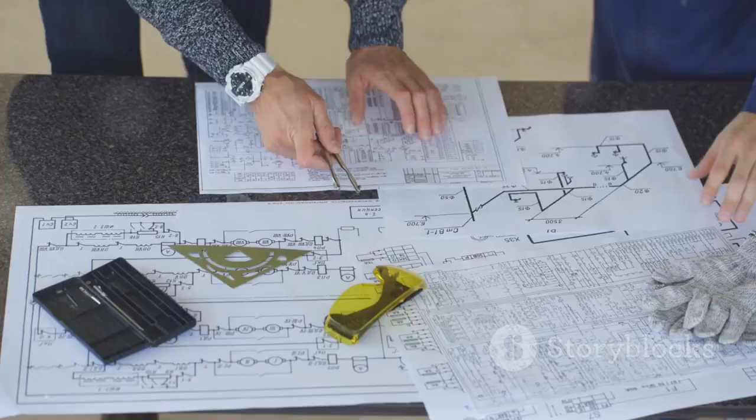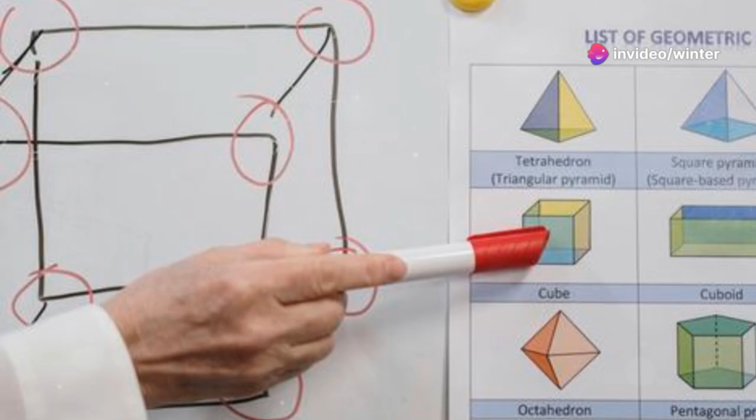Let's face it, traditional 2D engineering drawings can be confusing, forcing your brain to piece together flat views into a 3D object. Isometric drawing changes the game. It's a 3D pictorial view, showing an object as if you're looking at it from a corner, with all axes at equal measure. No tricky foreshortening. This method bridges the gap between blueprints and real objects, making designs instantly understandable to anyone, engineer, machinist, or client.

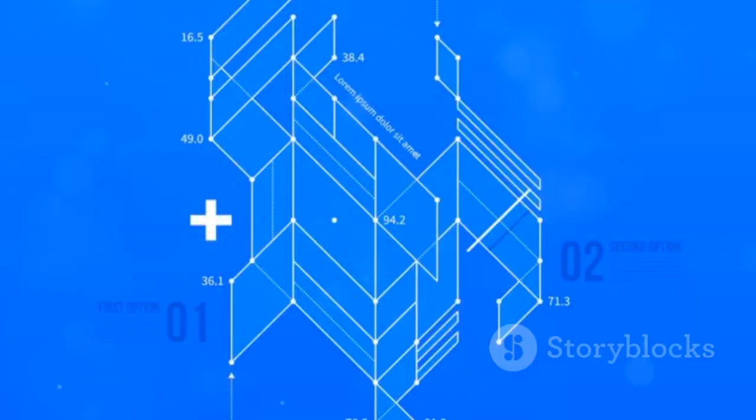Isometric views clarify how features relate in space, eliminating ambiguity. They don't replace detailed orthographic drawings, but they're the perfect companion, showing the big picture at a glance. Imagine explaining your design. A quick isometric sketch communicates more than words ever could. It's a universal language for brainstorming, presentations, and ensuring your design gets built right. Mastering isometric drawing means faster, clearer communication. It's an essential skill for every engineer.

Before you start sketching in 3D, it's important to gather all your essential tools. Preparation is key to a smooth workflow and better results. For hand drawing, isometric grid paper is a must. It makes setting up your axes effortless and helps keep your proportions accurate from the very beginning. Use a sharp mechanical pencil for crisp, precise lines, and always have a quality eraser handy for quick, clean corrections. These basics make a big difference.

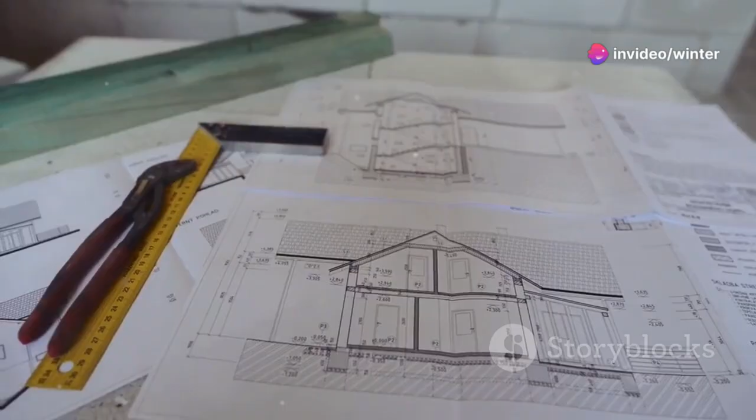Want to go pro? Add a drawing board, T-square, and a 30-60-90 triangle for perfect angles, since isometric axes are always at 30 degrees from horizontal. These tools help you maintain accuracy and speed up your process. In the digital world, CAD software like AutoCAD or SolidWorks has isometric modes that snap your lines to the right angles automatically, saving you time and reducing errors.

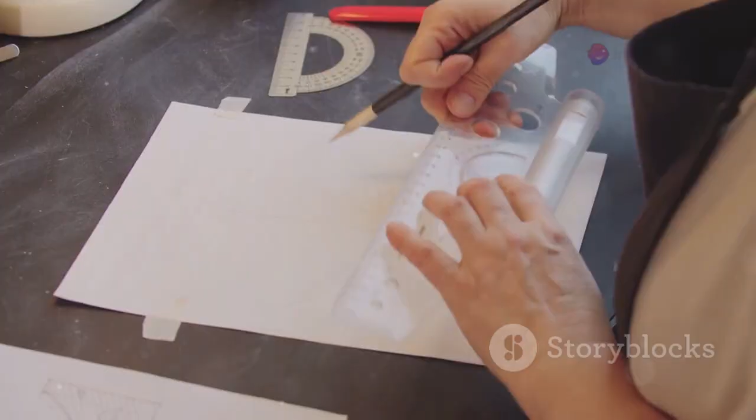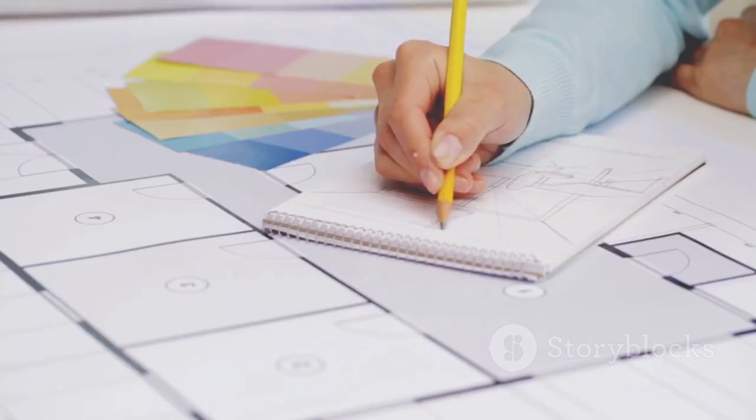Whether you're working by hand or on a screen, always start with light construction lines. These are your guides, not your final marks. They help you map out your drawing before committing to the final lines. Sketch lightly at first. You'll go over the real edges later with darker, more confident lines. This layering technique keeps your work clean and easy to adjust. Heavy lines too soon make for messy, hard-to-correct drawings. It's much easier to erase or adjust faint lines than bold ones. Think of construction lines as scaffolding, temporary but essential. They support your drawing structure until you're ready to finalize.

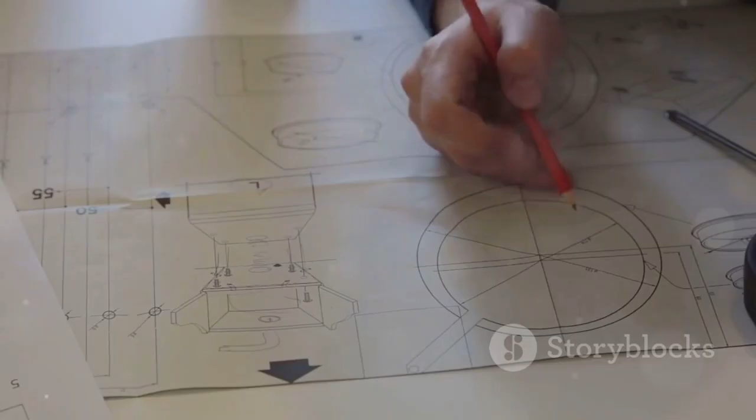The most important tool? Your brain. Plan before you draw. Take a moment to visualize your object and the steps you'll take. The second most important? Those light, barely there lines. They're the foundation of every great sketch. Start every drawing with a gentle touch, letting your ideas take shape gradually and naturally. Build up confidence as you go, darkening your lines only when you're sure of their placement and accuracy. That's how you get clean, professional results, by combining the right tools, careful planning, and a steady, patient approach.

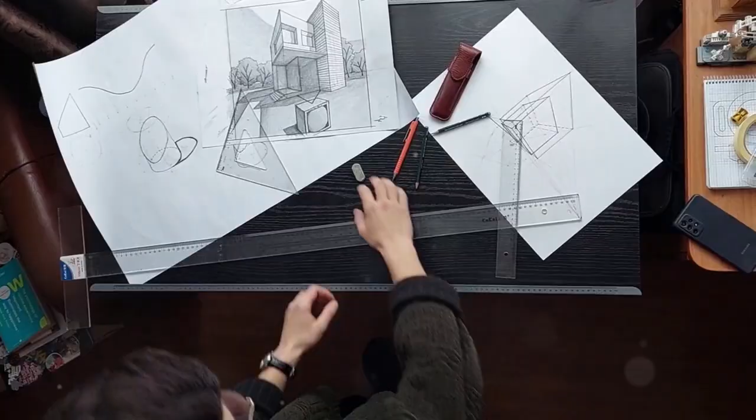Every isometric drawing starts with 3 axes, 1 vertical, 2 at 30 degrees from the horizontal. Picture the corner of a cube. This is your foundation. Draw a light horizontal reference line, pick your origin, then use your triangle to draw the 30-degree axis and a vertical axis. All measurements, width, depth, height, are made along these axes or lines parallel to them. Before adding details, sketch a light box that encloses your object. This keeps proportions correct and prevents distortion. This boxing method is your guide for every feature you'll add.

Any real-life vertical line stays vertical. Any horizontal line follows a 30-degree axis. Non-isometric lines like slopes come later. First, get your framework right. Consistency is key. Always use light lines for setup. Build the box before you build the part. This approach keeps your drawing accurate and easy to read. Don't rush. Lay the groundwork carefully. The setup phase is where precision starts. Get your axes and box right, and the rest falls into place. That's the isometric mantra.

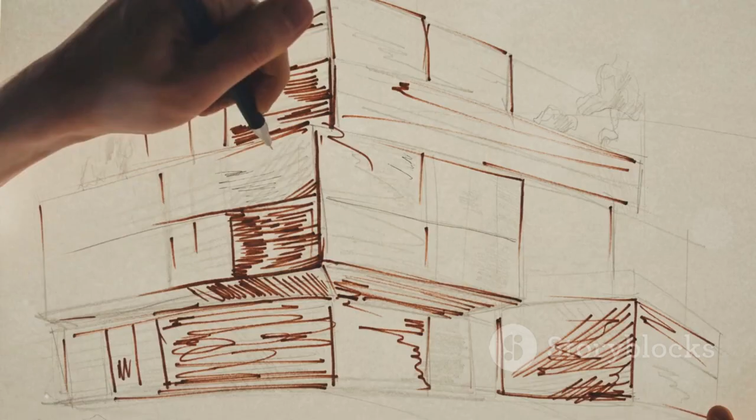The boxing method is your secret weapon. Imagine any object fitting inside a transparent box. Start by drawing this box using the object's maximum width, depth, and height along your isometric axis. For a cube, measure equal lengths along each axis, connect the dots, and you have a perfect isometric wireframe. For a rectangular block, use the same process with different dimensions. Once your light construction box is done, trace the visible edges with a darker line. This makes the object pop off the page.

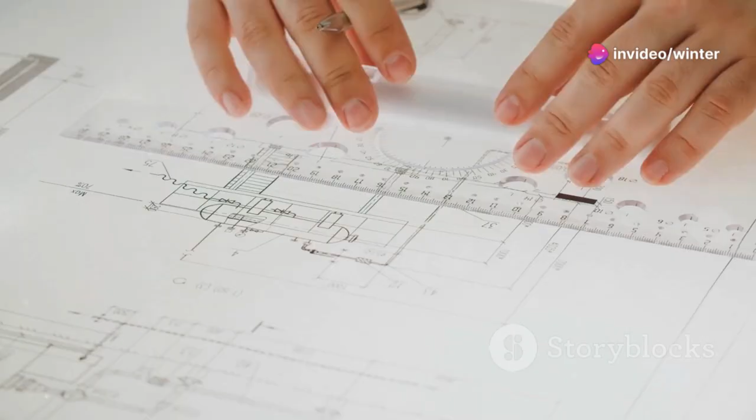The box keeps everything in proportion and makes complex shapes manageable. Always build the scaffold first, then finalize the object. This two-step process, light lines, then dark, keeps your drawings clean and professional. Master the box, and you can draw anything, no matter how complex. It's the foundation for all isometric sketching. Practice this method until it's second nature. Every great drawing starts with a box. That's the secret.

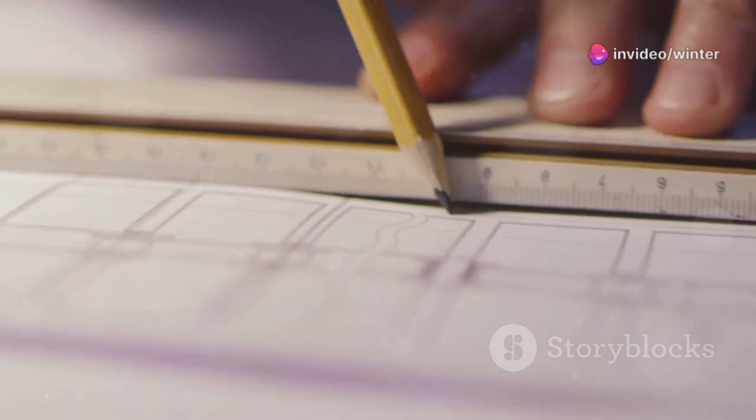Not everything is a box. In fact, most real-world objects have slopes, curves, and all sorts of funky shapes that make them interesting and functional. So how do you draw slopes and curves accurately in your technical drawings? For any angled or non-isometric line, use your box as a coordinate system. First, carefully locate the end points of the line within the box, then simply connect them. This method keeps your drawing precise and proportional.

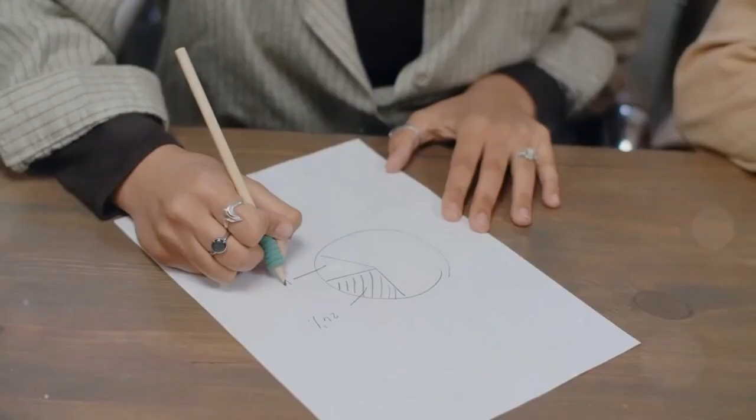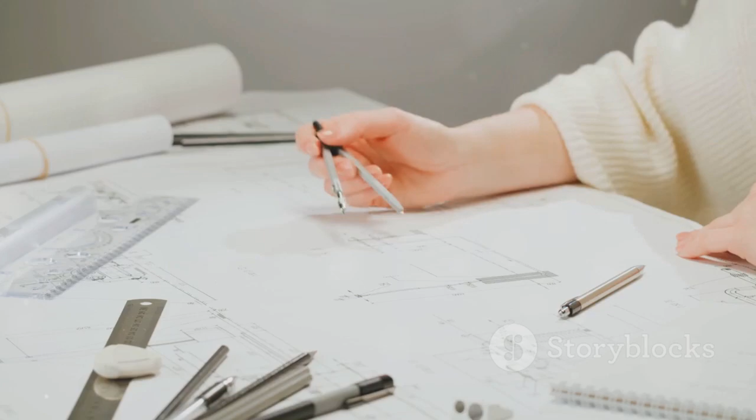For a wedge, start by drawing the enclosing box to define the boundaries of your shape. Next, find the start and end points of the slope you want to create, marking them clearly. Then, simply connect the dots. No angle measuring needed, just a straight line between your reference points. When it comes to circles, remember that in isometric drawings, circles become ellipses due to the perspective. Never use a compass for a circle here. It'll look wrong and distort the illusion of depth. Instead, use the four-center ellipse method.

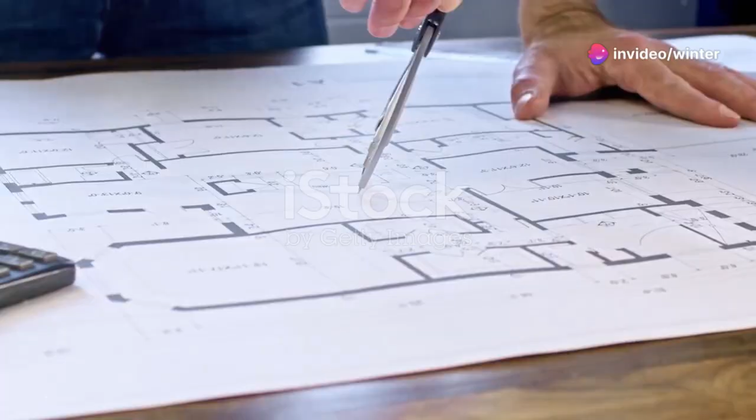Draw an isometric square, find the midpoints of each side, and use arcs to create the ellipse. This technique gives you a much more accurate result. For quick sketches, you can draw the ellipse freehand inside the isometric square, making sure it touches the midpoints for a convincing look. In CAD, use the ISO Circle tool for perfect, mathematically accurate results every time. The key is always to use the box to find reference points.

Practice drawing ellipses. They're essential for representing holes, cylinders, rounded edges, and more. Don't just guess at curves. Use construction lines to guide you, ensuring accuracy and consistency. Every complex shape starts with simple geometry. Break it down into basic forms, use your box as a guide, and connect the dots step by step.

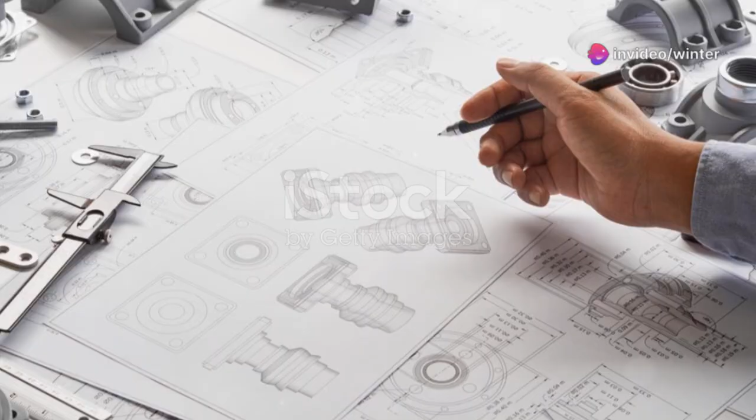That's how you handle any funky shape, no matter how complicated it looks at first. The box method works for everything: slopes, curves, and all the wild shapes you can imagine. Keep practicing, and soon these techniques will become second nature.

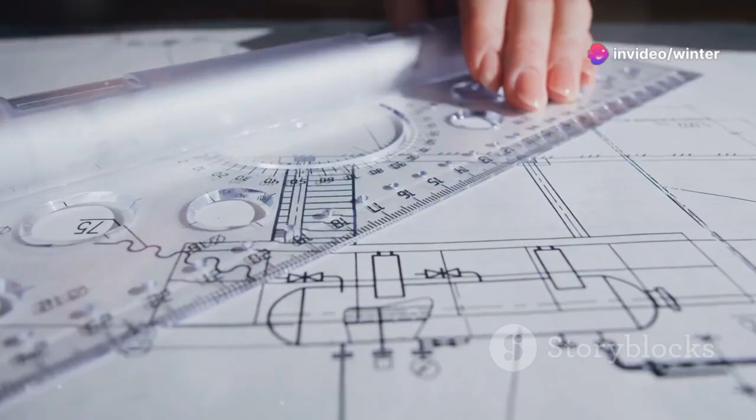Now let's combine shapes for realistic parts. To draw a cylinder, start with a box. Its top and bottom faces are squares equal to the cylinder's diameter, and the height matches the cylinder. Draw ellipses on the top and bottom faces, then connect them with vertical lines for the sides. For a hole, reverse the process. Draw the ellipse on the surface, then show its depth with a second offset ellipse.

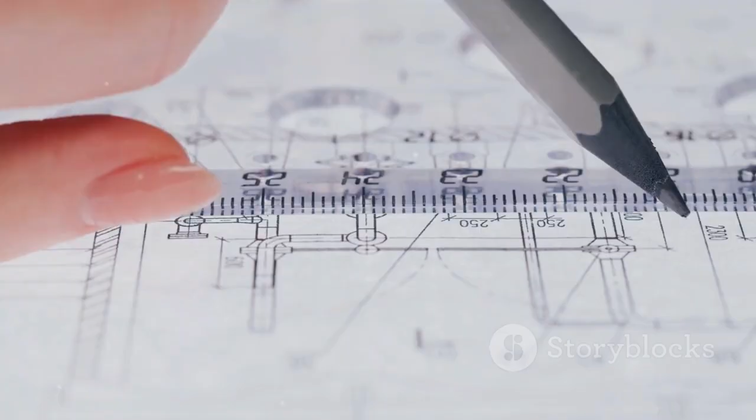For fillets and rounds, mark tangency points, then sketch a smooth arc between them, inside for fillets, outside for rounds. In CAD, use the fillet command, but by hand, focus on smooth, tangent arcs. These details add realism and clarity. Always use construction lines to find key points. Clean up with dark, confident lines for the final look. Details make your drawing stand out. Practice combining shapes and adding features.

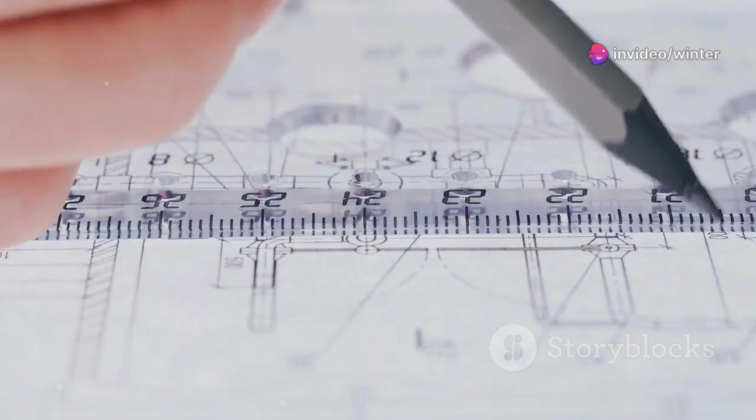Features like slots and pockets are just combinations of shapes you already know. For a slot, draw the center line, then the straight sides as isometric lines, and the ends as half ellipses. Drop vertical lines from the slot's outline to show depth, then connect the bottom with matching curves. Pockets are similar. Draw the rectangle on the surface, drop verticals from the corners, and connect the bottoms to form the floor.

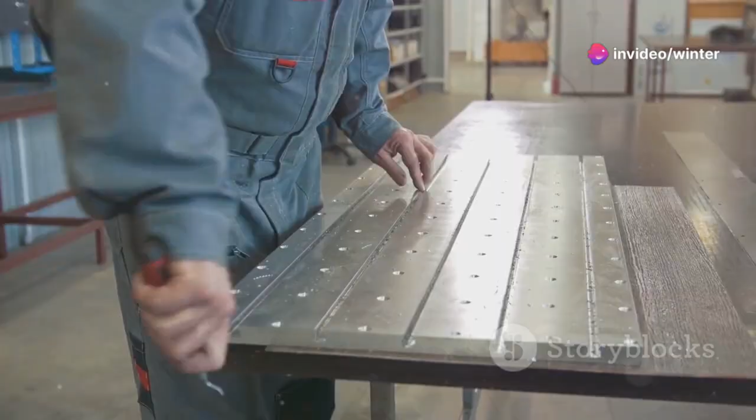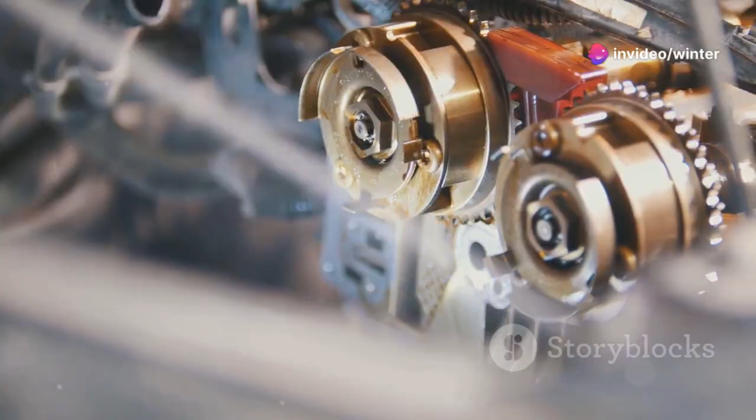Chamfers are even easier. Measure back from the edge, draw a parallel line, and connect to create the beveled surface. Use light lines for setup, then darken the final edges. These techniques make complex parts easy to visualize. Always break features down into basic shapes. Use construction lines to keep everything aligned. Add details step by step. That's how you show inner workings clearly. Practice these features to level up your drawings.

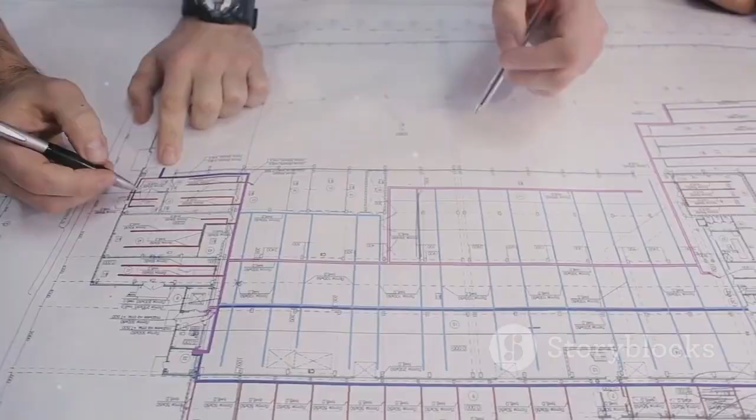A drawing without dimensions isn't useful, so add them the isometric way. Dimension and extension lines should run parallel to the isometric axes. Write numbers so they sit on the isometric plane. Use oblique text if possible. In CAD, set dimensions to match the isometric view for a professional look.

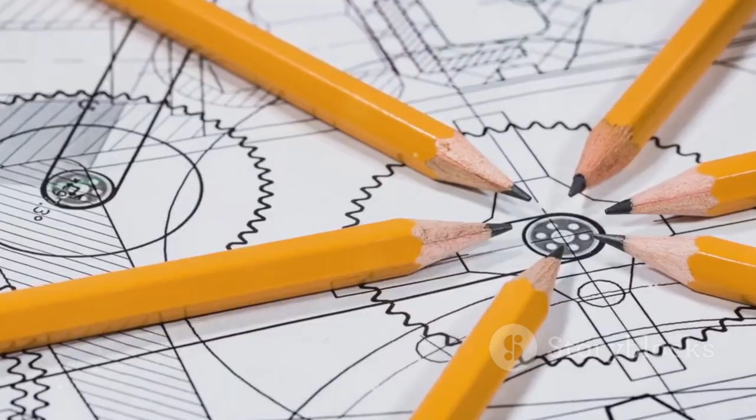Avoid common mistakes: never eyeball angles. Use your triangle or grid. Don't mix perspectives. Keep everything in isometric. Never draw true circles. Always use ellipses. Use consistent line weights: light for construction, dark for visible edges, dashed for hidden lines. This hierarchy makes your drawing readable.

Sloppy lines confuse the viewer. Control your pencil or CAD settings. Clear, accurate dimensioning is the mark of a pro. Practice these habits every time you draw. That's how you avoid rookie mistakes.

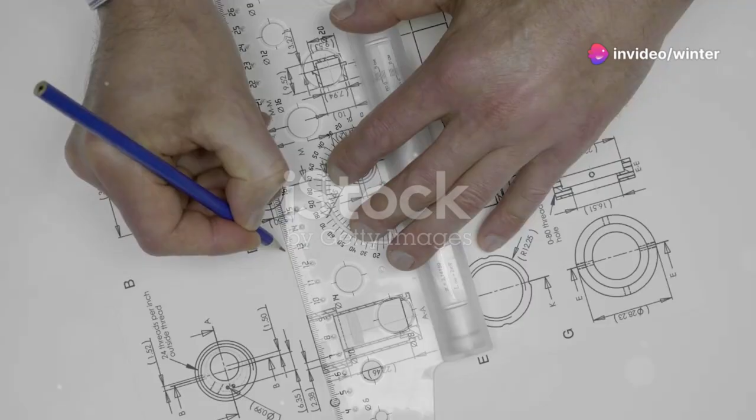Now it's time to practice. Let's put theory into action and see how your skills translate to the page. Here are 3 classic isometric challenges to get you started. First, try drawing an L bracket, a staple in mechanical design. Begin by sketching a box that defines the overall size and boundaries of your part. Then carefully erase the sections to reveal the L shape, making sure your proportions stay accurate. And finally, add a hole as an isometric ellipse to complete the bracket.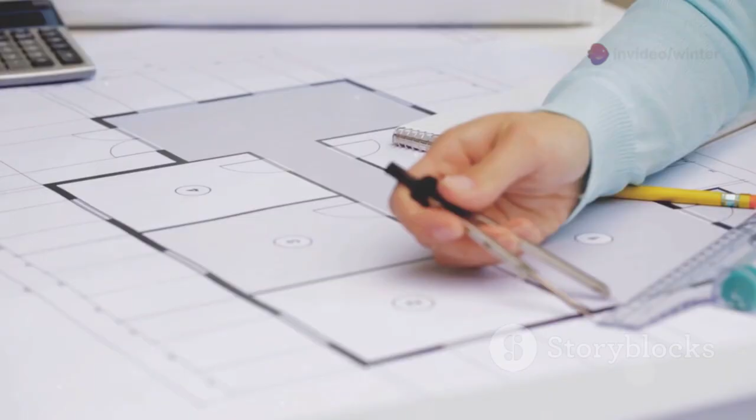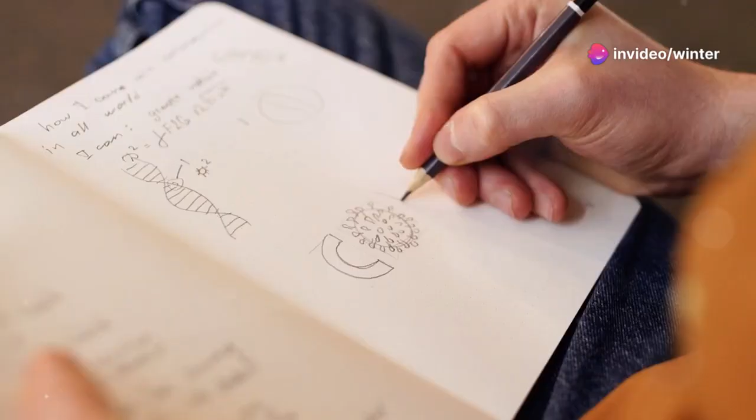Next, tackle a flanged plate. Draw the main block, then add a centered cylinder on top using ellipses and tangent lines to make it look three-dimensional and precise. For the third challenge, draw a hex nut. Start with a box, construct a hexagon on the top face, project the sides down to give it depth, then add the central hole as an ellipse, and sketch in chamfers for extra realism and detail.

For each drawing, always start with light construction boxes and guidelines to map out your shapes, then add details step by step, building up complexity gradually, and finish with clean, dark lines to make your drawing stand out. Don't rush. Accuracy comes from careful setup and patience, not speed. Mistakes are part of learning. Fill pages with sketches and don't be afraid to experiment.

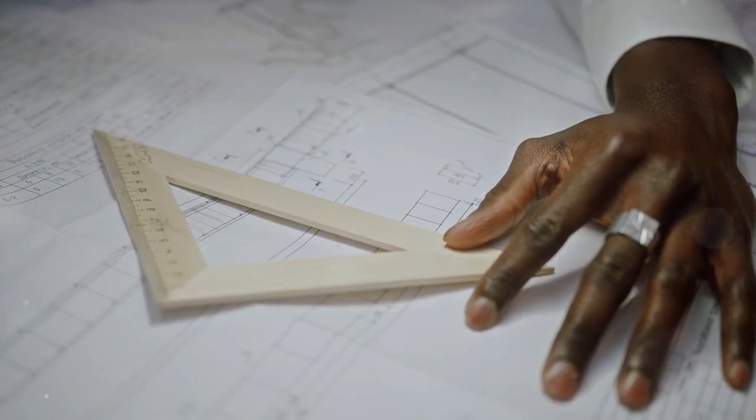The more you draw, the more natural isometric thinking becomes, and soon you'll visualize 3D before your pencil even touches the paper. Practice is the only way to master these skills. Use the boxing method, draw proper ellipses, and pay attention to clear line weights every time for clarity and professionalism. Challenge yourself with new shapes and features. Try drawing objects you see around you or invent your own parts.

Build confidence with every drawing and celebrate your progress no matter how small. Soon you'll start to see isometric shapes in everyday objects, making sketching even more intuitive. So grab your tools, set up your workspace, and get started right now. Put on some music, relax, and enjoy the process of bringing your ideas to life. Remember, every master started as a beginner, and improvement comes with every page you fill. The secret is to keep drawing, keep experimenting, and never stop learning. Go make something cool. You've got this.